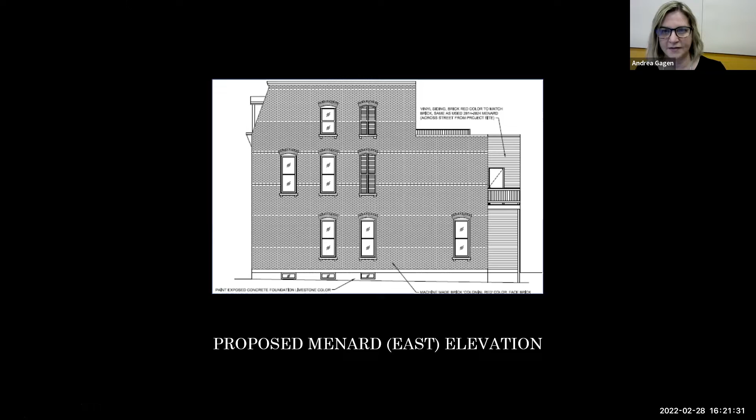I'll talk about this side first. We'd also ask that the brick on this side extend past the window, as the distance between that building and the adjacent building has increased due to the parking pad. The owner stated that he would do that, but we haven't received the drawings for that. Next.

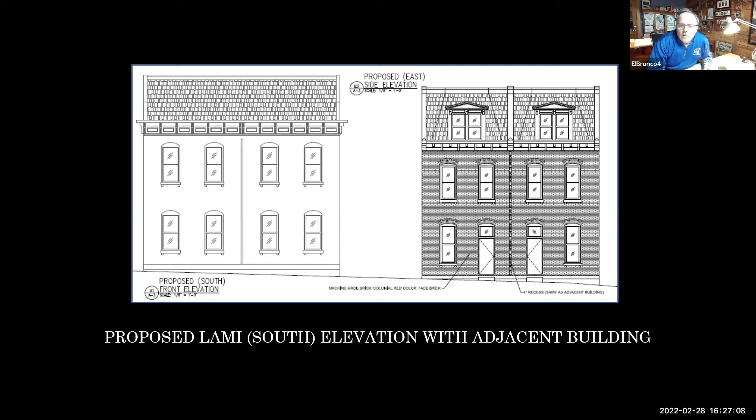Yeah, Andy, I've got a question. So this issue that they had with the curb cut, or the curb cuts, and then the detailing of the one curb cut, is that something that can be addressed by you guys, or is that not in your purview?

Well, the curb cuts, technically, it's not, and I don't believe that's particularly in the standards, except for the fact that it kind of falls into the slope of the yard.

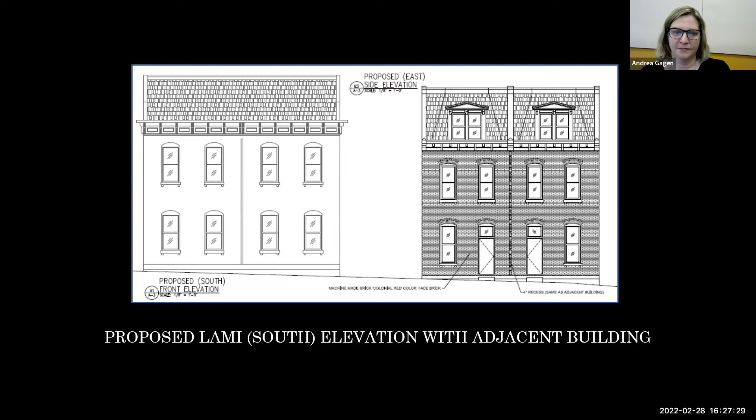Now, on the Lami side, I don't think that's so much of an issue because there's not a huge grade change there at that point.

The one at the back, I would say that falls more within our purview, not so much the curb cut, but the parking pad, because it's kind of all tied together, but because there is a change of the grade there, because the back of that yard kind of slopes up towards the existing building behind on Menard. So it would be helpful to have a little bit more detail on how that was being handled.

Okay. And do you feel you got the usual community consultation that you would get from Soulard on this? No, I think they didn't receive the revised plans until the preliminary agenda came out because the applicant hadn't gone to them previously. So they have had, I guess, since the 18th, it was the first time they saw them.

Okay, and that answer would be the same with the alderman? He saw it at that time too. Yes. Okay, thank you. May I interject, or should I wait till all parties are completed there? I'm finished. Thank you. Okay.

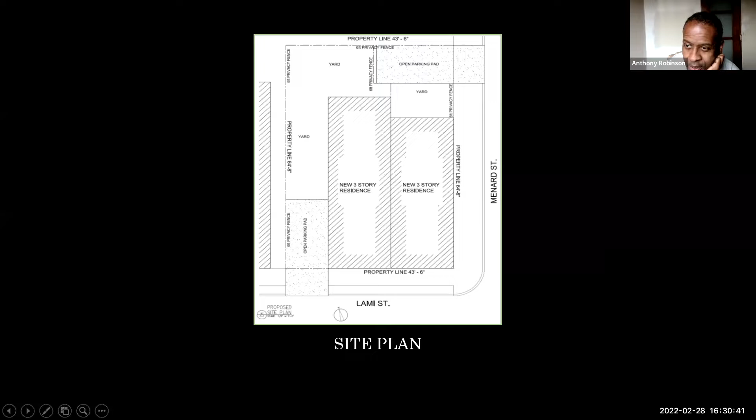Further question, go ahead. Thank you. Andrea, do we do anything about trees? I noticed in some of the pictures there's lots of large trees. Do you know if they plan on just bulldozing all that, or can they save any of them?

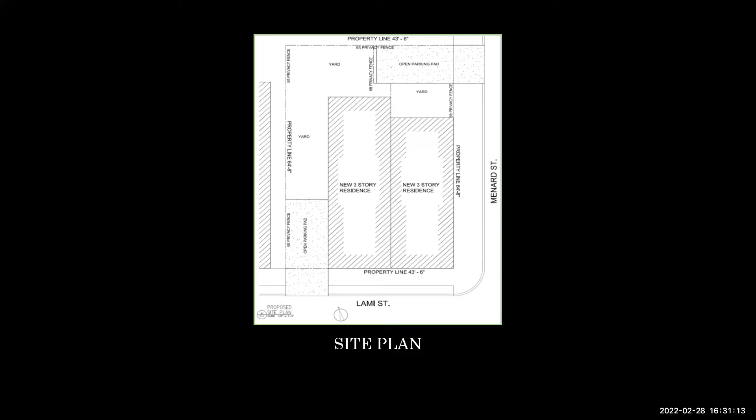That you'd have to ask the applicant. Okay, I'm not aware. Mr. Chairman, can I ask him? No. Okay, as soon as he makes his presentation, we'll direct questions from commissioners to the applicant. Got it. Otherwise it will be as chaotic as Mardi Gras has been in Soulard, and probably just as distracting to members of the restoration group.

So I have one more question. In your write-up it said it looked like there was partial compliance with a bunch of items, so I'm not fully certain of it. You said mass scale, garage placement, ratio of solid to void. That actually, I think, was a leftover from the previous one. It substantially complies. The only thing that only partially complies is the setback and the siding.

Okay, I guess because you didn't have time to update the staff report when he turned in the new drawings on the 18th. Yeah, we hadn't gotten all the details at that point. Okay, thank you. Further questions from commissioners?

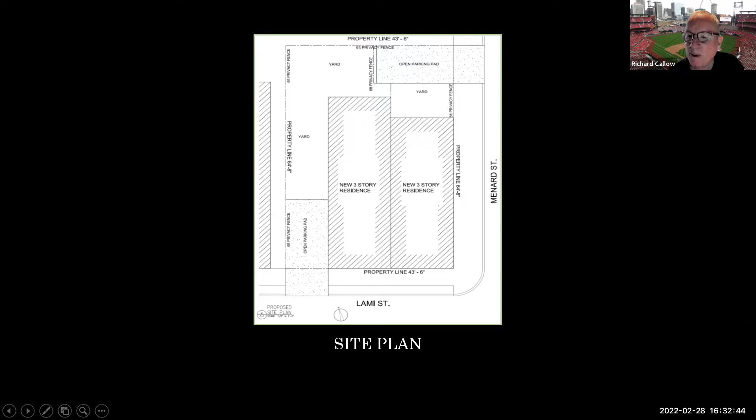Okay, Mr. Askins, let's hear from you. I'm going to speak briefly, and I think you can also direct questions to Jason, he's the architect, he's in the meeting as well. But I just wanted to address, I guess Mr. Callow had questioned regarding how, and I think Commissioner Robinson as well, we made every effort to try and get

Soulard involved after we were declined back in June. I spoke directly with Alderman Jack, and I have many correspondence with him requesting if he wants me to meet with anyone or sit with anyone, to let me know, and or if he could put me in touch with those parties. That never occurred. What eventually occurred was he recommended I speak directly with Meg and Andrea, and that's what we had been doing for the past 4 months or so, back and forth to get closer.

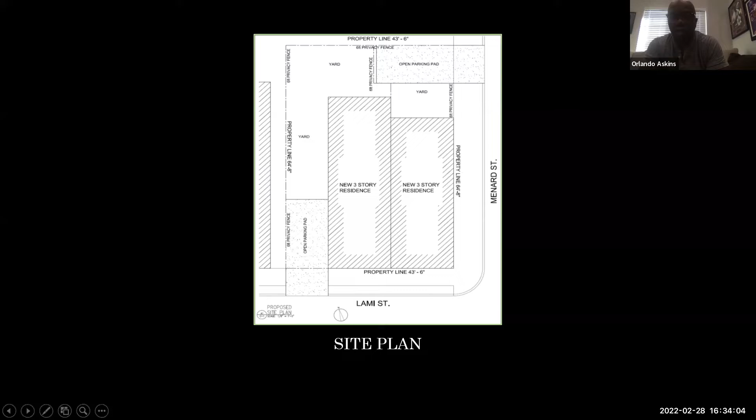And I think we all agree we've gotten closer. We've made substantial compromises and corrections to the drawings from, if any of you recall what we had back in June, in order to try and satisfy the board. We've eliminated, we had examples of garage doors street facing, though some of them were 2-story units as opposed to 2.5-story. There was quite a bit of garage facing doors in there, and we removed that off these drawings just to hopefully satisfy the board, and hope you guys will be pleased with that.

So we've done that. As far as curb cuts concerns, we're going to have off-street parking on this property. It's in the zoning, and it's certainly going to help us when it comes to selling these properties, having some form of off-street parking. So we're only making curb cuts for 2 cars, which would, if they weren't there, the buyers or people who occupy this place would take up at least that many. I think our parking pad would accommodate possibly 2 cars, so that's 4 cars that would be off the street by eliminating 2 curb cuts. So we think that's a plus as well, and it's needed.

I think that's it for me. Other than that, it seems like we had gotten to the point where we complied with every single thing on here that is asked of Soulard's guidelines. The only thing we didn't, I think it was partially, and some of that had to do with material. We're open to working with the board if we have to go with a certain material, fiber cement, as opposed to vinyl. We prefer the vinyl, obviously for cost reasons at this point.

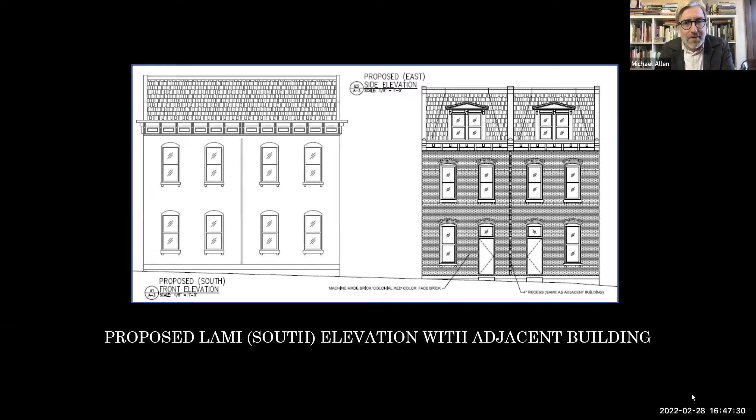This is Commissioner Allen. I joined Commissioner Richardson in trying to take this off the agenda, but since that vote failed, I think we should vote today. We voted to hear this. I don't think deferral makes any sense at this point, and there aren't many complicated issues from the staff perspective. I agree, and we can't set a precedent to take things off the agenda because we know people are against it. To me, that's not right.

Orlando gave his presentation, and Andrea or whoever reviewed it gave their opinion. So I don't see where the complication is. I say we move forward with the vote.

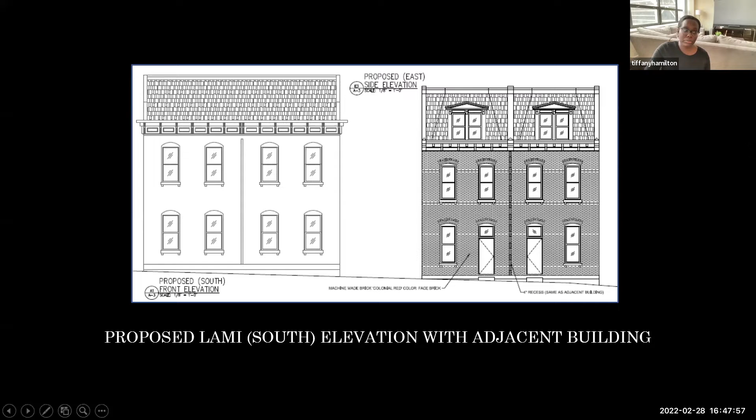I'll add to that. It would be different if people were against it, but that's not what we're dealing with now. We're dealing with a deferral, not people saying this is not right, this is completely wrong. We're dealing with a deferral, which is different than this doesn't work, this doesn't fit.

And obviously Cultural Resources has said they are in support of preliminary approval. So why are we deferring this?

I would only note that staff has said they in fact talked to the applicant last week, and that they had a request from the neighborhood association and alderman to defer consideration until next month. I am understanding of the deferral. This wasn't a surprise today. This is something that's been discussed for the last week because of the intervention of holidays and Mardi Gras.

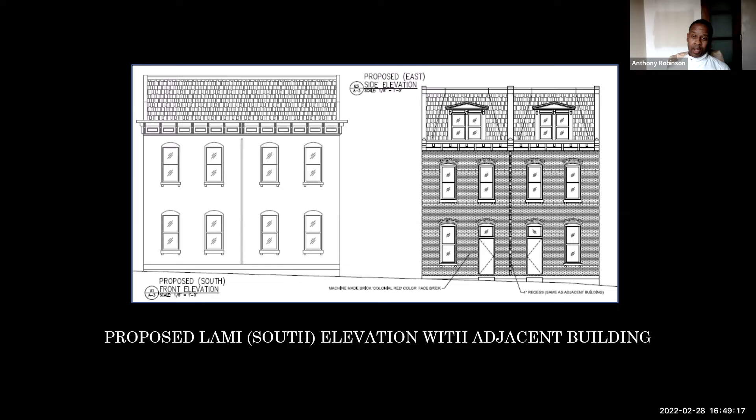Commissioner, if I may interject, this was actually brought to my attention that they wanted to defer, not for the past week, but on Friday. Mr. Askins, yes sir, we are talking to you right now. Okay, I didn't know that. My apologies.

I guess my concern is, we've had other people in front of us who weren't able to make it, and we said, well, let's make a decision based on where we are. So I'm confused as to why there's so much discussion on this when all the timelines were met.

Sorry, that's my laundry going off.

I would add, it is a preliminary review, this is not an appeal. I really don't think it's a major item to vote now. There still has to be a permit, there still has to be further review. We've spent so much time talking about this, I don't know why we can't proceed.

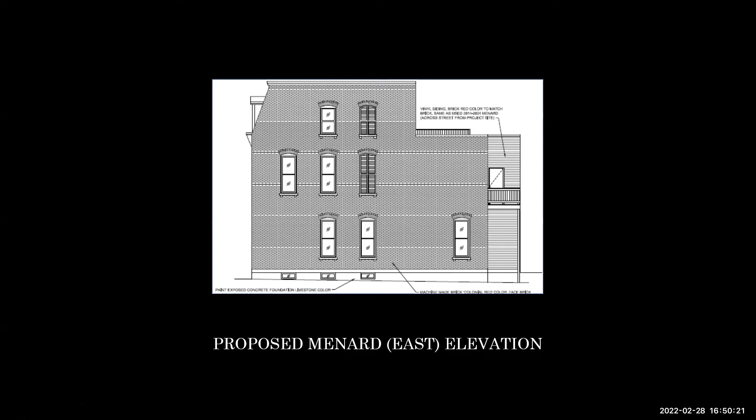I would like to call the question, Mr. Chairman, is that how we get a vote going? I can't even tell who's speaking. Commissioner Weber. It's Commissioner Weber, I have no way of knowing that. Where's your camera, Commissioner Weber? There you go, all right. At least he's not in his car. Okay, some of us work.

Is there any further discussion? Okay, Commissioner, there's a motion on the floor that's been made and seconded. I will call a roll.

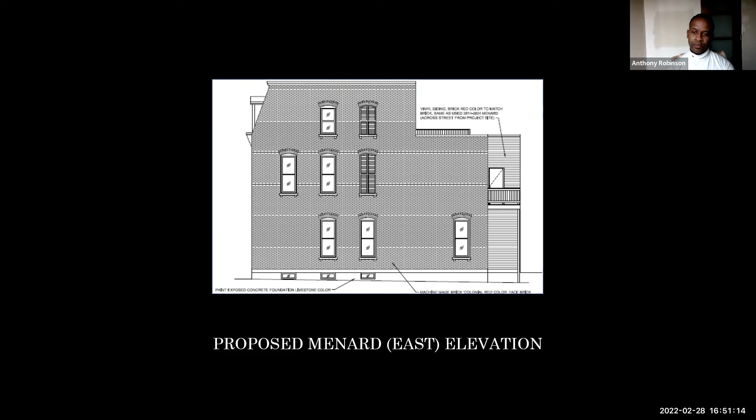Commissioner Allen, do you vote yes or no? Wait, could you restate the motion, Mr. Chairman? Motion is to defer consideration. No. Commissioner Robinson, do you vote yes or no? No. Commissioner Hamilton, do you vote yes or no? No. Commissioner Killeen, do you vote yes or no? Yes. Commissioner Richardson, do you vote yes or no? Yes. Commissioner Weber, do you vote yes or no? No. That is 4 no's, 2 yeses, and the motion fails.

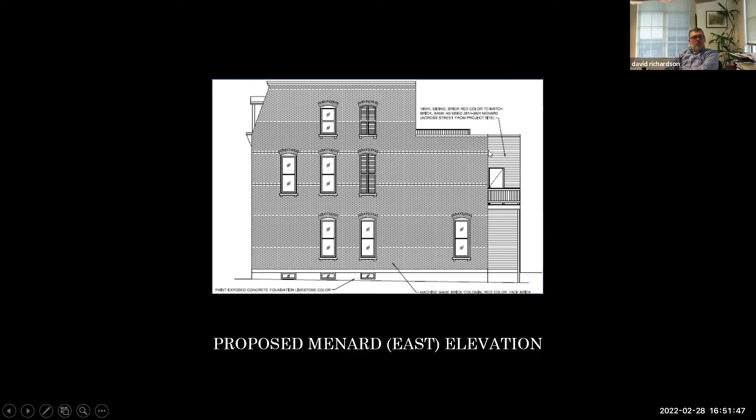Do I hear a second motion? I have a motion. I move that we grant preliminary approval with the conditions that the siding on the east elevation and rear of the building be 4-inch cementitious lap siding, and that the Cultural Resources Office review and approve final design details and exterior materials and colors, and that the applicant meet with the SRG one time. Is there a second? Second.

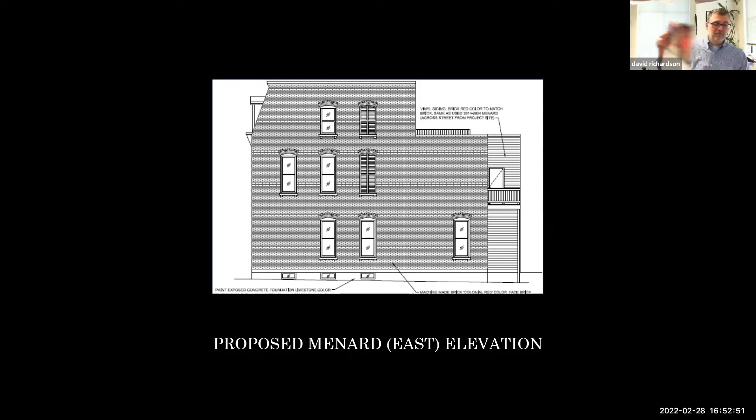Any discussion? Hearing none, I'll call the roll again, unless somebody moves the previous roll. Any objection? I'd like to change my vote on the previous roll, though. Okay, I'll call the roll. Commissioner Allen, do you vote yes or no? Yes. Commissioner Robinson, do you vote yes or no? Yes. Commissioner Hamilton, do you vote yes or no? Yes. Commissioner Killeen, do you vote yes or no? Abstain. Commissioner Richardson, do you vote yes or no? Yes. Commissioner Weber, do you vote yes or no? Yes. Chair abstains. That is 5 yeses, 2 abstentions.

The motion carries. Thank you, commissioners. Do we have our special agenda item yet? We do, I believe Jason Whiteley is in the room, and I'm going to attempt to let him share his screen. Give me just one moment.

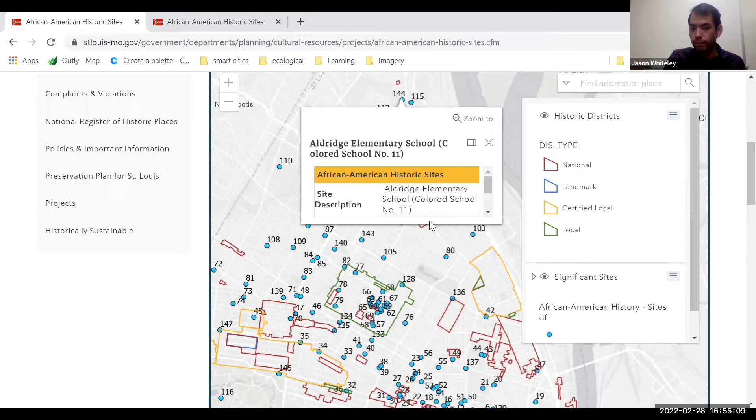Over the last few weeks, CRO and PDA have been working to identify and map sites of cultural and historic significance to the African American community in St. Louis. We've been able to publish that work on an interactive web map, which we've made available to the public through CRO's homepage. From the CRO homepage under the project section, we've added this map of African American historic sites. As you can see here, we've identified, I believe, about 150 sites of significance so far. We've made this resource public so people can see where these sites are in the city and also learn a little bit more about them.

I'd like to emphasize that this web layer is still preliminary, and we're hoping to continue to add new sites and also add some additional information on the sites we've identified thus far. All of the little blue dots are sites, and you can click on them to see the site description, its address, its neighborhood, and then we've also provided a layer with historic districts for additional context.

I think that was all I had to share. Are there any questions? That is pretty awesome. I think it's really great that we've been able to allocate some time to this work, and I hope that we can continue to develop it and put it to some good use.

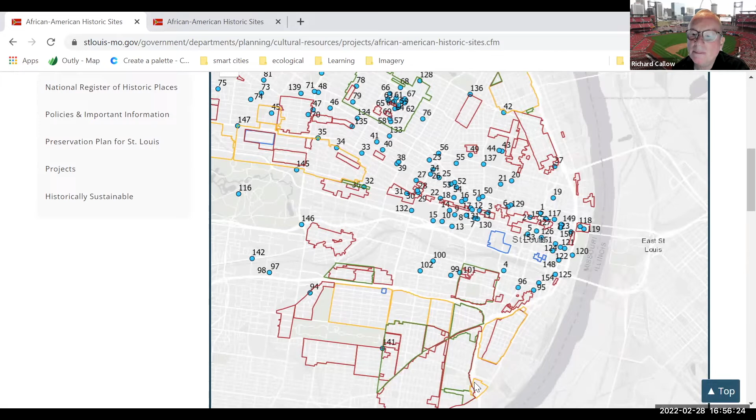Commissioners, any comments? I think it's cool. I love it.

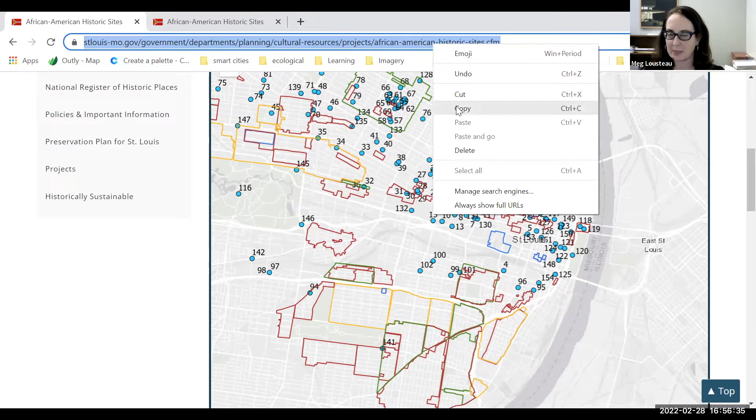Mr. Chair, if I may add, we realize that this map is not comprehensive. It doesn't include everything. There's so much research to do. During the last board meeting, I mentioned that we would like to go after some historic preservation fund grants. This seems like an ideal project for us to try and get a grant to study, to do an inventory, much like we did of flounder houses and mid-century modern properties, to do a more comprehensive inventory of sites important to the African-American history of St. Louis. I look forward to expanding on this great groundwork that we've already laid with Jason's help.

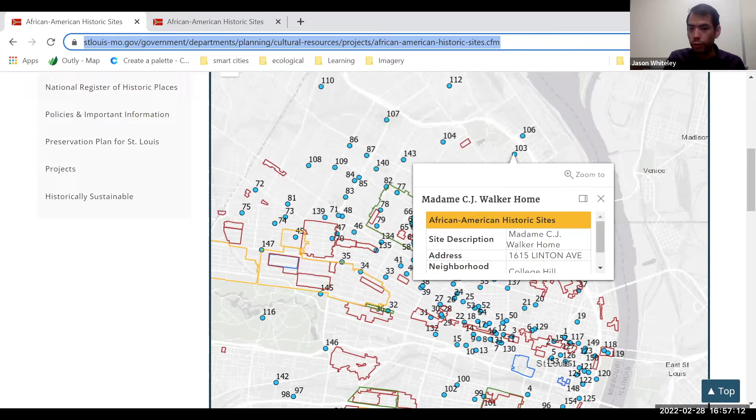I love this. Meg, would you be sure that the clerk of the Board of Aldermen, former Alderman Terry Kennedy, former Preservation Board member Terry Kennedy, gets to see this? I will absolutely do that. It is a project that I believe he would strongly appreciate.

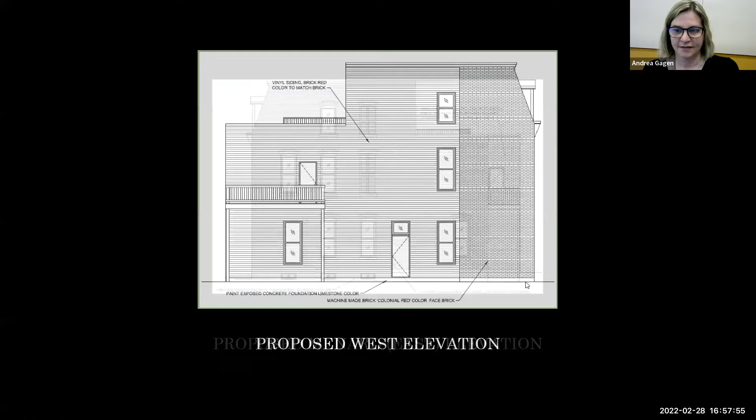Thank you very much. Calling agenda item B 3234. Can we get the PowerPoint back? Okay. All right, my plan is to call these things randomly so that the PowerPoint is never correctly lined up. Bob, aren't you glad you're back? Sorry, I was on mute. He's thrilled, it's wonderful to be back. It's great, we're thrilled to have him, believe me.

All right, this is 3234 Hawthorne Boulevard, Compton Hill Historic District. You might remember this from a few months ago. They had come in to get approval for a porte cochere, which was not approved. And they've changed their plans at this point.

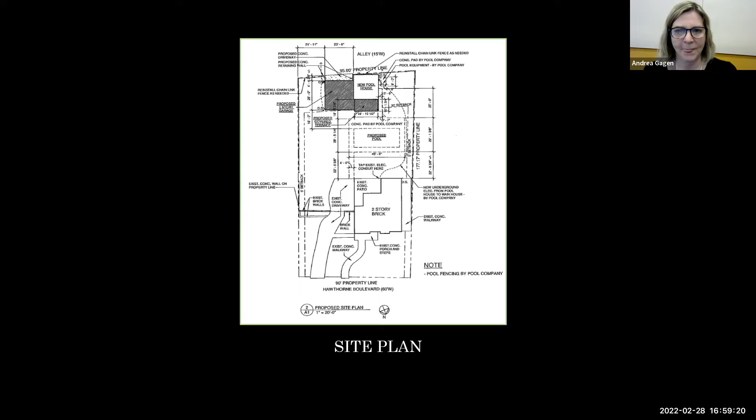Our issue is that while the existing garage is stucco, only an extremely small amount of that will actually be visible from the street once the new gabled cover and the addition are added to it. We recommended that they use brick on the addition instead of stucco, because it does not conform in style or design to the architectural style of the period in which the principal structure was built. There is no stucco on the main structure.

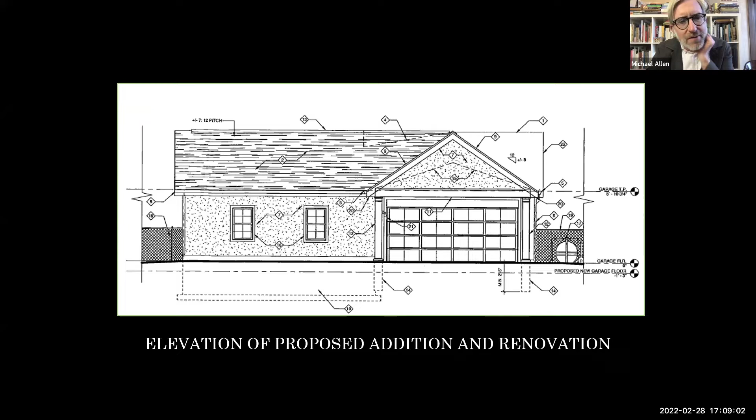Commissioner Allen, that would be my understanding as well. If staff differs, jump in, but I definitely think we're just talking about this wall elevation to the left of the garage opening. I had understood the motion to refer to the wall. Okay, I understood it as for any front-facing materials.

And likewise, I understand that the side elevation, not ceiling, we can maintain as stucco or siding. Do I understand that correctly? So we could choose to use stucco or siding for the side elevation. Now, does that suggest we could also use stucco or siding for the gable? That's something we can discuss.

It sounds like you have a supportive neighborhood group and a supportive preservation board and a willing staff. And I suspect this project is going to be a very good one. I think so. Okay, thank you very much, commissioners.

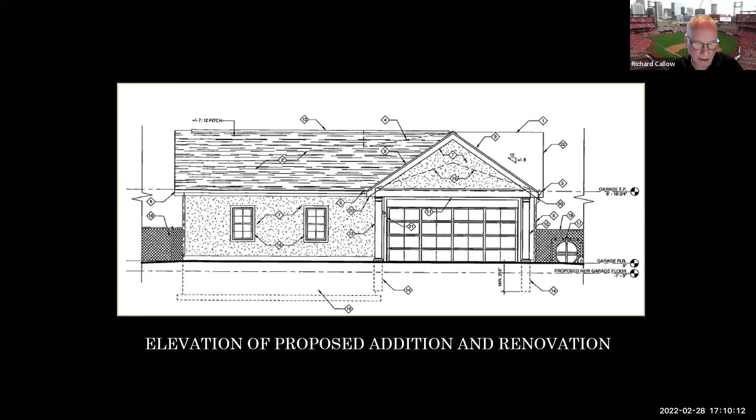Let's do agenda item C, beginning with 33. Okay, this is 33 Westmoreland Place in the Central West End Historic District.

This is an application for the extension of the side elevation. Next.

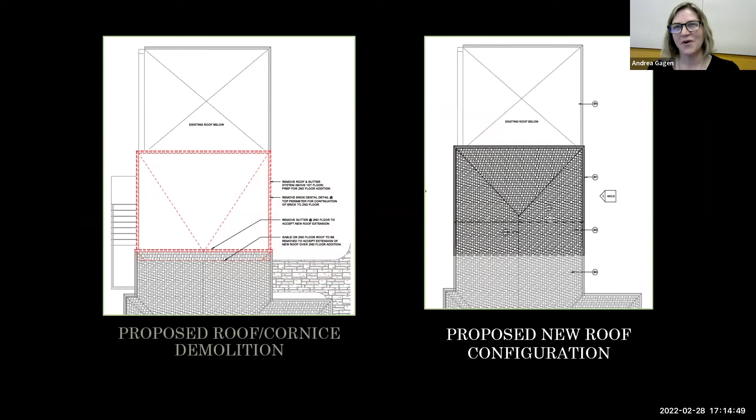Gagen, this is a trick question. Did you consult with the 28th Ward Alderwoman? Well, that would have been a little tough, as there is no 28th Ward Alderman at the time. Okay, you passed the trick question.

Commissioners, questions for Ms. Gagen? Okay, let's hear from the applicant.

Hi, I'm Rachael Dolan with Mitchell Wall Architecture and Design. For this home, it is highly visible on Lake Avenue and Westmoreland Place.

So far from this design, we have gotten very strong support from the trustees and neighbors, especially the one across the street at number 35, Rick Zimmerman. He's done quite a bit of historical renovation throughout St. Louis, and he was very thrilled with this proposal. So it has been well received in the neighborhood. I know they gave a glowing recommendation for it via letter.

There has been a lot of discussion with the Central West End Association. The first discussion was coming back with an alternate roof and different material, but we found that the alternate material was not present in the rest of the house. So we were a little concerned about the visual character, especially with a house of this nature. Following up that conversation, there was openness to having it blend a little bit more with the home.

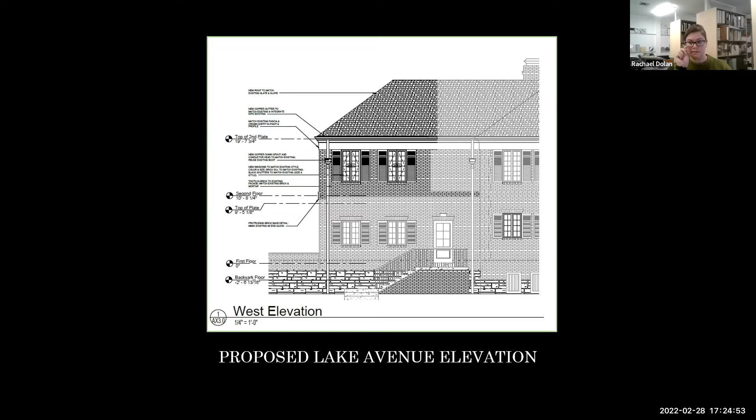Ms. Gagen, your response? Well, I think the band that they have now is the same as what's on the building, so I'm not sure that really distinguishes it from the original. I think they were proposing it to be more like a soldier course, or something slightly different than what was on the front portion of the building, so that it would distinguish it from what was already there. The trustees don't necessarily look at the historic district standards when making their decisions. What we have to go by, and what the neighborhood looks at, is the historic district standards, which I don't think this complies with at this point.

Okay, thank you very much. Commissioner Allen, another motion from you? Oh, thank you. I move that the Preservation Board withhold preliminary approval of the proposed addition, as it does not meet the Central West End Historic District standards. Is there a second, commissioners?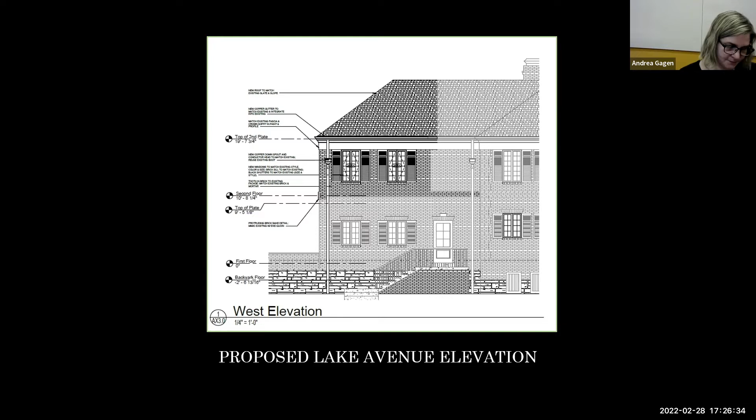Discussion? Commissioner Robinson? Yeah, so I think the applicant is probably in a really tough position here with this design. I've looked at it, reviewed it. I question whether they can create a nice design here, given what they have to work with, while meeting the requirements. I do understand the delineation between old and new, but honestly, short of changing brick patterns, things like that, to delineate old from new, I think anything else comes across as a not well thought out add-on.

Even if you've given some thought to it, it comes across in the final product as a not well thought out add-on. Because of that, I think we put the applicant in a really tough position with this design. Honestly, I think the only decent design here is essentially what's sort of there going on top of what's existing. But I think the delineation needs to happen in the materials that already exist, more so than trying to bump out and make changes like that, because I just don't think that comes across as a well thought out design. That's the issue here. I think you could do that, but you're just not going to have a good design. So now the question becomes: what's the lesser of the two evils? A design that complies but doesn't look very good, or a design that doesn't quite comply but works?

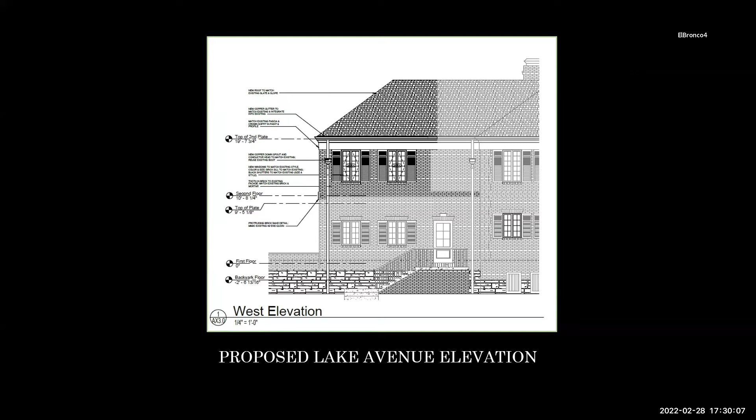Commissioner Kalina, are you still on? Still here, yes, sir. Observation, you've done this. I would defer to Mr. Dwyer, that's his part of town, and I think he made a great argument.

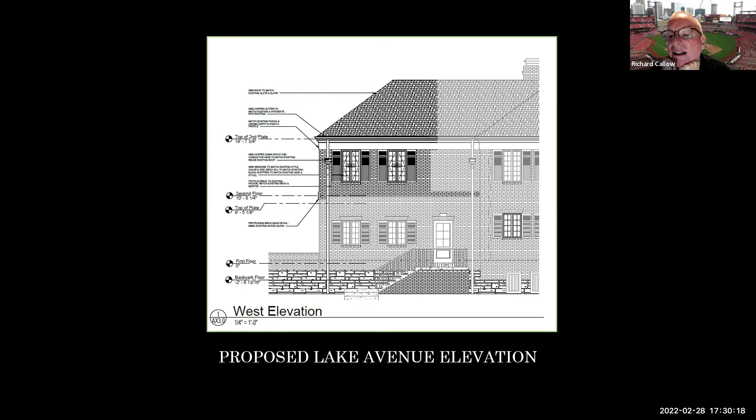Commissioner Allen, your motion? Yes, I disagree somewhat with Commissioner Robinson. I think the standards offer a very clear path here, but it sounds like from hearing the applicant's architect and Mr. Dwyer that the gap between these perspectives isn't quite that wide. What I see here is that the Cultural Resources Office is actually allowing a lot of continuity with fenestration and form. And I see the slate roof and the brick, and I keep thinking slight differentiation in color could resolve some of this issue, something that clearly is not original but not widely different, and doesn't require a change in material. I would be comfortable with that as a member of this board, but I don't see that here. Thankfully, we're on preliminary review. I do think for the applicant this is a good use of preliminary review, so I'm glad we're looking at it early.

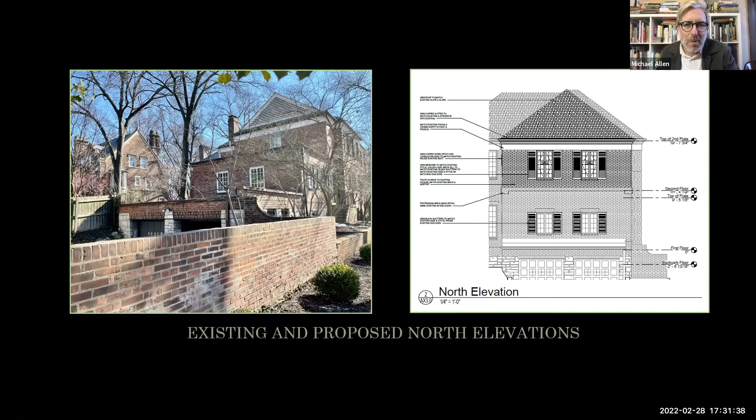But I don't see this as so irreconcilable. I think it sounds like, given all the inputs, maybe a strong input from this board could help resolve what seems like intractable tension.

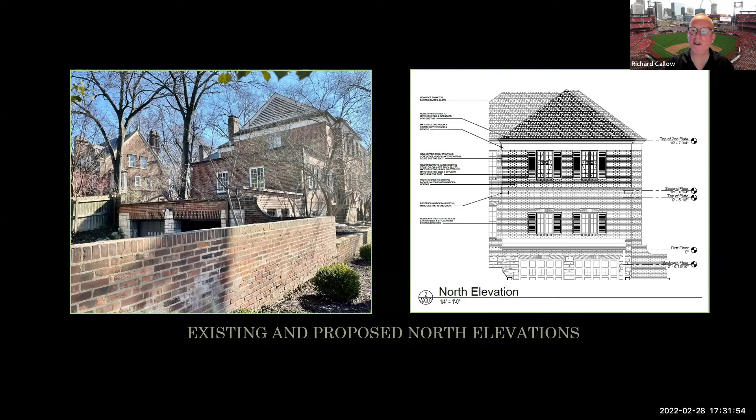Any other commissioners with comments? Okay, hearing none. Commissioners, there's a motion on the floor that has been made and seconded. I'm going to call a roll.

Commissioner Allen, do you vote yes or no? Yes. Commissioner Robinson, do you vote yes or no? Abstain. Commissioner Hamilton, do you vote yes or no? Yes. Commissioner Killeen, do you vote yes or no? Yes. Commissioner Richardson, do you vote yes or no? Yes. Commissioner Weber, do you vote yes or no? Yes.

The chair abstains. That is 1, 2, 3, 4, 5 yeses, 2 abstentions. The motion carries. Thank you very much.

Commissioners, moving through our agenda, I call agenda item D, 2018-2020.

Am I unmuted, I hope? I'm Jan Cameron with the Cultural Resources Office, and this is a preliminary review application to construct 2. Jan, are you speaking? Oh, I'm not unmuted. Oh, that was pretty good, wasn't it, guys? Oh, you're so.

This is a preliminary review application to construct 2 detached, 2-story single families on this vacant piece of ground in the McKinley Heights Local Historic District. Next, please.

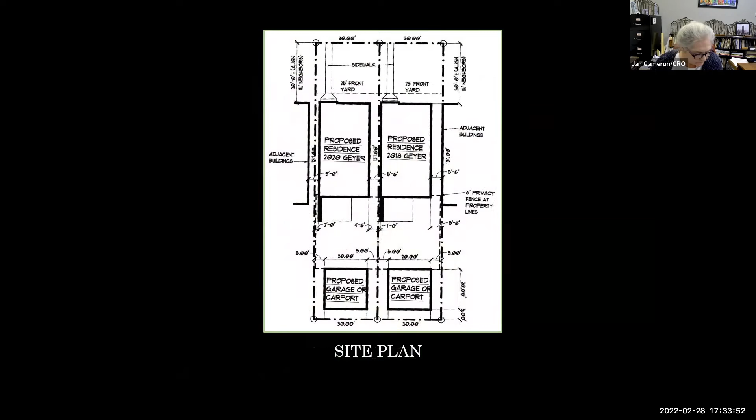And the site plan includes 2 garages located directly behind each house. Next.

And this is the front elevation. It will be the same for both. What you can see from the notes, but not so much from the rendering, is that the right section of the house will be a different color brick than the other, but they'll both be brick that's appropriate for the neighborhood. Next.

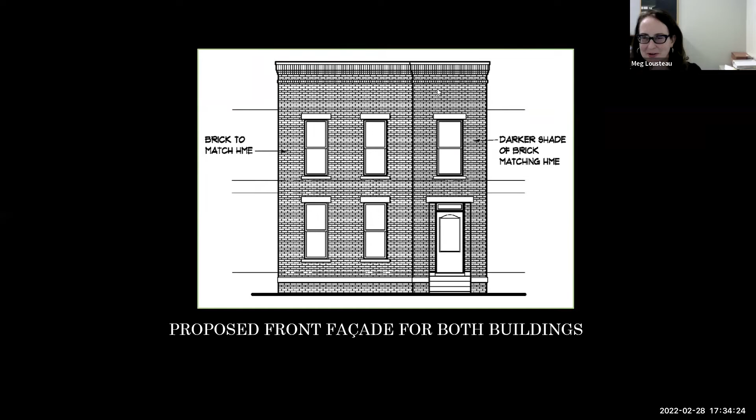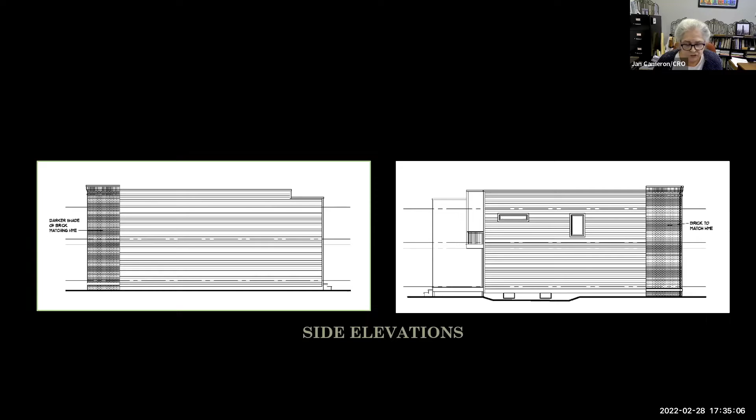These are the side elevations, and they return, as we usually require for new construction. The brick returns the same distance as the distance between the buildings. That's what's shown here. Next, and they will be very close to the adjacent buildings.

Okay, so the context is very good. Now, we had initially seen a very contemporary design for this site, and in fact, the applicants were going to pursue the compatible new construction policy. But in the revisions after meeting with us and with the neighborhood group, the revisions really made that unnecessary, that they're actually following the standards in almost every point, with the exception of the brick foundation color, or the brick foundation and the color of the brick on the facades, the two different colors. Those we think are very modest changes and do not detract from the compatibility of the buildings.

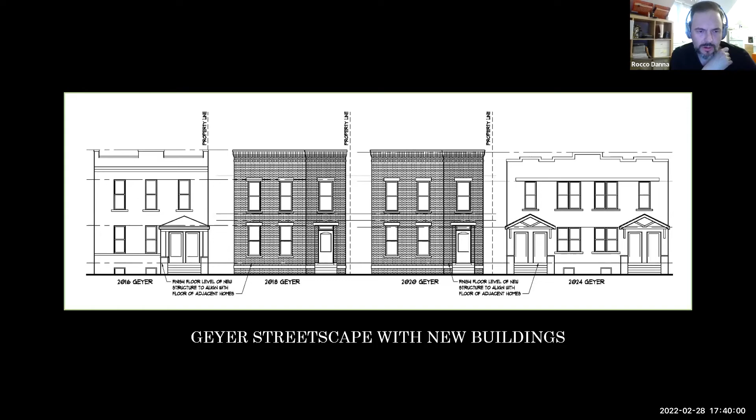The other observation I have is that the streetscape, thank you, makes it appear—I understand these are done very quickly—that the windows are really in rhythm and proportionally in size with the neighboring buildings. However, if you look at the neighboring buildings of 2016 and 2024, you'd find that they're a little bit squattier, and in 2024 they're again a little bit squattier. They're not as lean as shown in the elevation.

Also, we would like to see fiber cement siding used in lieu of vinyl. This is something we've always been pushing for to have changed in our historic code, fiber siding with a 4-inch exposure. So other than that, I don't think I have anything else to comment on at this time.

Great, thank you very much. Meg, anybody else to speak? There's no one else.

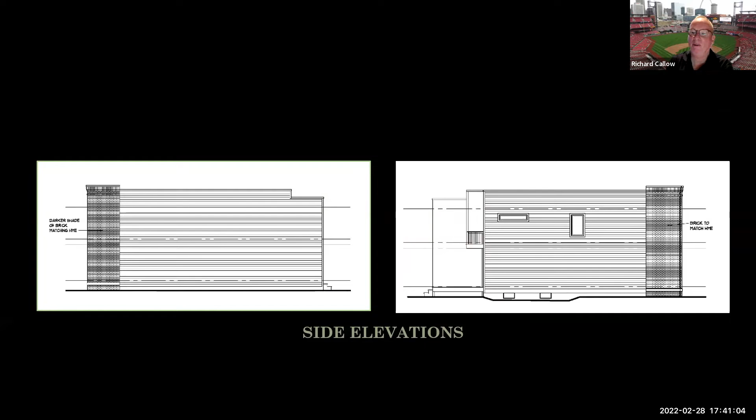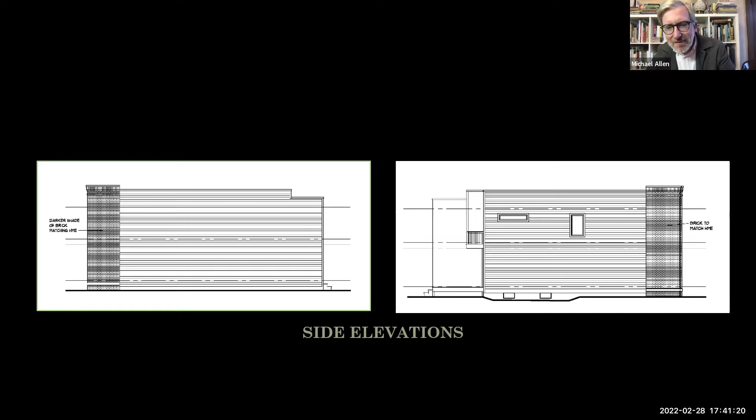Okay, Commissioner Allen, ready for another one of your learned motions? Me again, Mr. Chairman. I move that the Preservation Board grant preliminary approval of the project, subject to review of final drawings and exterior materials by the staff. Second. Okay, any discussion?

Okay, then I'm going to call a roll. Commissioner Allen, do you vote yes or no? Yes. And Commissioner Allen, that will be the last motion I ask you to make tonight. Thank you, I'll keep my video on anyway.

Commissioner Robinson, do you vote yes or no? Yes. Commissioner Hamilton? Yes. Commissioner Killeen? Yes. Commissioner Richardson? Yes. Commissioner Weber? Yes. The chair abstains on this vote. I count 6 yeses and the motion carries. Thank you very much, commissioners.

We're going to take a 2-minute break, and then we're going to come back and hear an unusual appeal.

I was so excited to see that yellow house in the presentation. I sold that a few years ago, that was a good looking house, a great house. Did you get a good one? The judge's house, yeah, it was the judge's house. I hope—it sold before it hit market. I sold it to a buyer before it hit market. Gorgeous house. It was. There it is. Yeah.

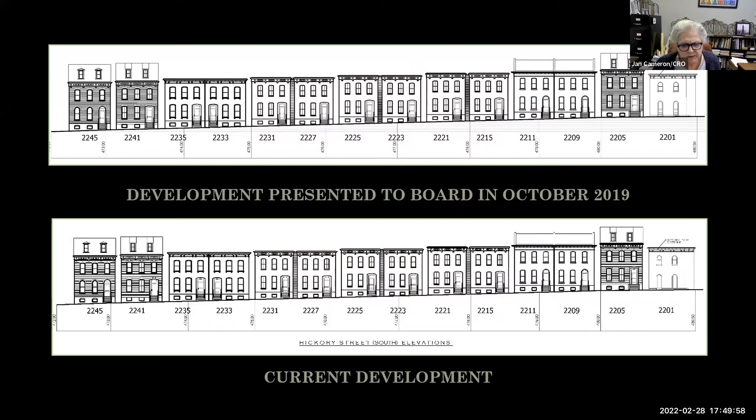What you see at the top was what was presented and approved by the Preservation Board in October of 2019, showing some detached townhouses and some with side gable roofs. Below that is the currently proposed design, which is a little bit different, though it looks like it's just about the same, doesn't it? Next, please.

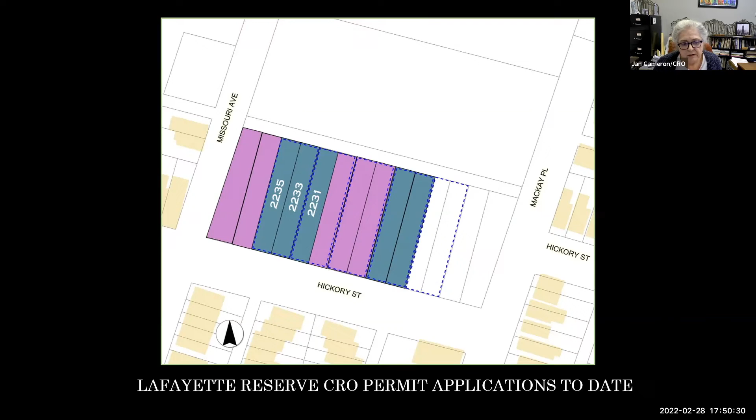This is a little chart I put together regarding the status of permits that the Cultural Resources Office has seen and approved. The violet color indicates full building permits for full buildings, and the gray color is for foundation-only permits. Those that are numbered are the three properties being appealed at this meeting.

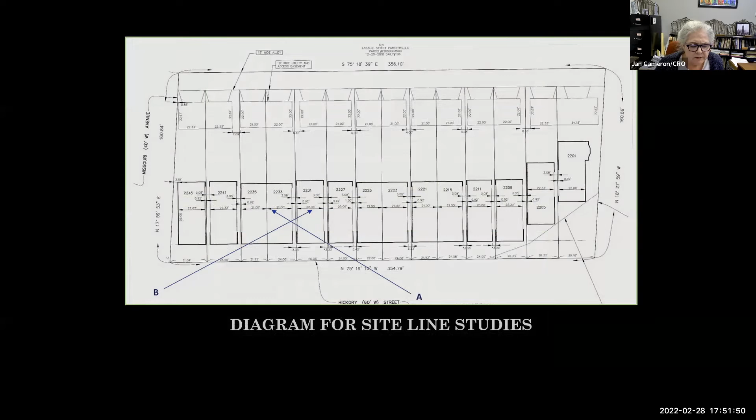These are some sightline studies that were submitted to us by the applicant, but he is going to present them in more detail, so we'll skip over these for now. The contention is that these protrusions, as illustrated in this elevation, will not be visible from the street.

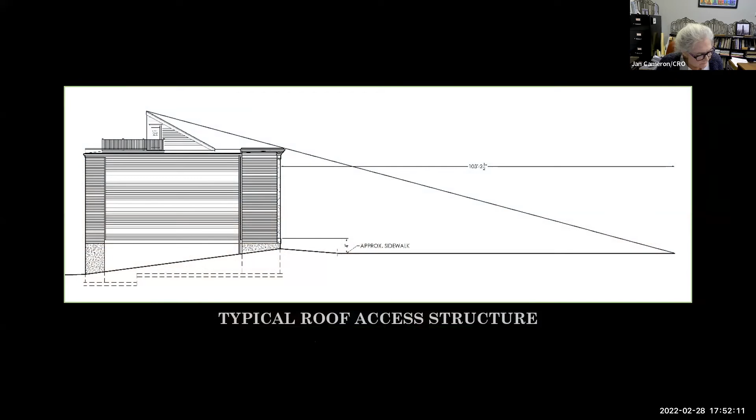This is the corner property. We are on the western end of the site, and the 14 townhouses will fill this entire side of the 2200 block of Hickory. This property will be visible both from Hickory and from Missouri, the street on the left. Currently you can see some foundations have already been constructed from previously approved applications.

And we're proceeding eastward along Hickory. Next.

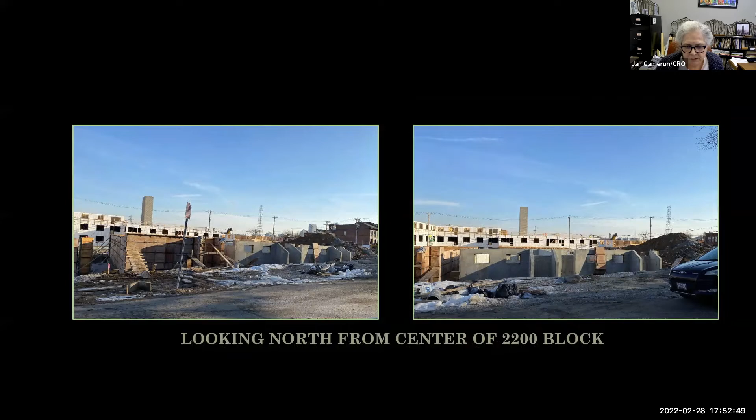And now we're looking back. This is again the site, but what we're looking at is a partially completed apartment building, also approved by the board, which still needs a couple more stories constructed and will border these properties on the north. The slide on the right begins to show you MacKay Place, and the visibility of this property from MacKay and from Hickory.

Again, this is MacKay, and we're looking towards what's known as the ellipse, which was constructed maybe 30 years ago, longer than I've been here. You can see that it's almost impossible, I feel, that these roof additions will not be visible from the street. The right slide is the alley that will divide the commercial, the apartment building from these townhouses.

Now we're proceeding from north to south on Missouri, past the apartment building. This is the corner of Missouri and MacKay. And again, particularly the slide you see on the right is going to be... I don't know how this possibly can be hidden.

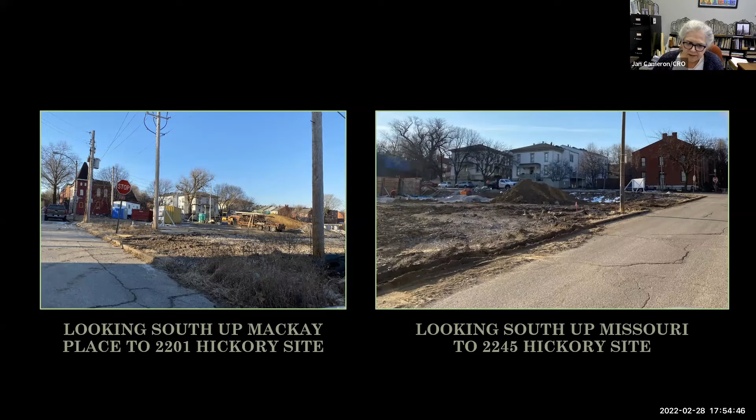But I'm going to let the developer make his case. One of the alternatives that we thought about doing was to change the shape of these very unusual forms into something that's more like a monitor or a flat roofed addition that you sometimes see. You don't normally see those on residential properties, but in order to give the developer every opportunity to make his case, that is something that the board may consider.

And that's it. So the staff is recommending again that any approval of these additions not be upheld until and unless we can all be convinced that we can't see them.

So, any questions? Is it good enough that we're convinced, or do you have to be convinced also? Well, we're all going to be convinced. Any questions, commissioners?

Okay, Jeff. This is an appeal of a denial, so I'll need your name and your affirmation that you're going to tell the truth, and I'll need you to introduce any documents or other materials that you want in the permanent record.

All right, my name is Jeff Winzerling. I promise to tell the truth. My address is 4229 Maryland Avenue, St. Louis, Missouri. Now, we've actually stopped doxing people. Oh, really?

I'm here on behalf of Lafayette Reserve LLC. I swear to tell the truth. Proceed.

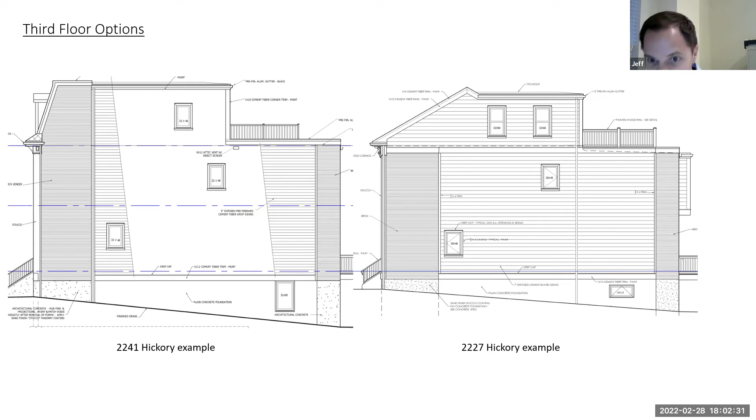And then let's go back 2 slides up. There you go. There's some other stuff going on the roofs here in addition to third floors, and that's what we're really here to talk about. This is 3 slides ahead. There you go. It's - I call it a pop-up. The architect, Barry Nelson, calls it a roof monitor, as you can see down there on his sightline drawing.

But the third floor space is extravagantly expensive. To do a third floor and a roof deck is $151,000 right now - that's the mansard style. The non-mansard style is just a little bit less, remarkably. You don't save that much money once you pay for the staircase and the additional framing and the full bath. So it's a lot of money.

And lots of the buyers wanted to get up and outdoors. That's been a pretty consistent demand. Even one of the houses that doesn't have a roof pop-up, the buyer has put a 2nd floor deck on the back of one of the 2nd floor bedrooms. So getting outside and up in the air has been a real consistent demand from a lot of our buyers.

And so we came up with this solution of the pop-up, which is designed to be inexpensive because the 3rd floor is so expensive. It's this triangular shape - essentially an indoor staircase that leads to a door that allows you to go outside on the roof. On a couple of houses, there's like a little coffee bar on the 2nd floor, so that if you're up on your roof deck and you don't have any living space next to it, you can still easily get to a place with a sink and a refrigerator or something like that.

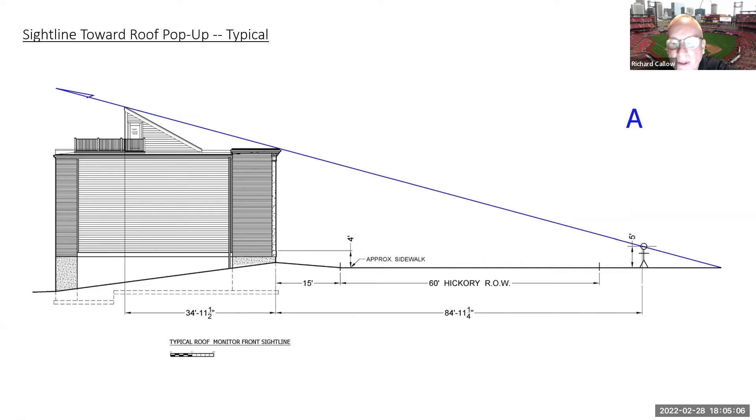Jeff: So I have a question - how tall is that person, and why does it have an arrow in its head? You have to talk to Barry about the arrow, but the person is probably about 5'5", 5'6". If their eyeballs are at 5 feet off the ground, you probably get about 5 or 6 inches of head above your eyes.

That's what we used as the standard height for all of these. The geometry is worth noting though. The right of way of Hickory: sidewalk, tree lawn, street, tree lawn, sidewalk on the other side totals 60 feet. You can see this person is 85 feet away from the building. We're 15 feet back from the property line, so it's a total of 75 feet away from the south edge of the Hickory right-of-way, or the south edge of the Hickory sidewalk. You'd have to be 10 feet beyond that in order to see even an inch of the top of this roof monitor.

There's some more we're going to look at that I created, and I don't have the technical skills or software that Barry does, so they're a little cruder. But our goal is to illustrate what I thought was clear from the beginning, but I'm still trying to persuade you all, is that these will not be visible from the street.

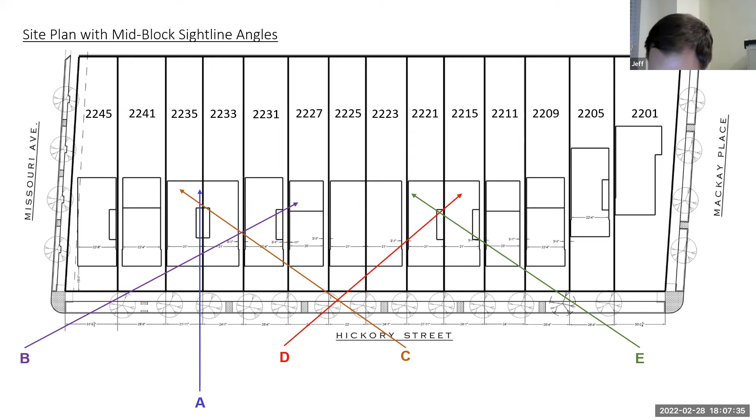Next slide, please. Oh, I guess I should mention these are a little conservative in how I do them, because where Barry was able to actually plot the house in his software and show you the cornice and how far it projects from the building, I'm just using the face of the building as though it were the first line. So it's slightly conservative, but let's look at the next slide.

Oh, hold on a second. Let's go back. This one imagines, once again, a person whose eyeballs are 5 feet off the ground. All of the ones I did are a little different. Barry's was: how far away would you have to be to see just a skosh of the top of the pop-up? With my limited technology, I just said, okay, how about I put a spot 20 feet out into the street and see what we can see from there. So mine are a little bit different.

But this is one of mine. It's a spot 20 feet south of the north curb of Hickory, so it's past the middle. Hickory is 36 feet wide, so 18 would be the dead center of the street. This is a little bit past the center of the street. It looks up toward the roof monitor on 2231, because the ones on 33 and 35 cannot be seen from that point, since the arrow would be cut off by the 3-story building at 2241.

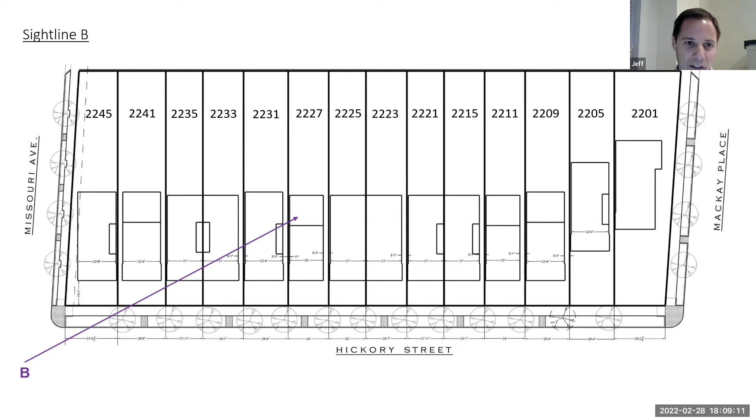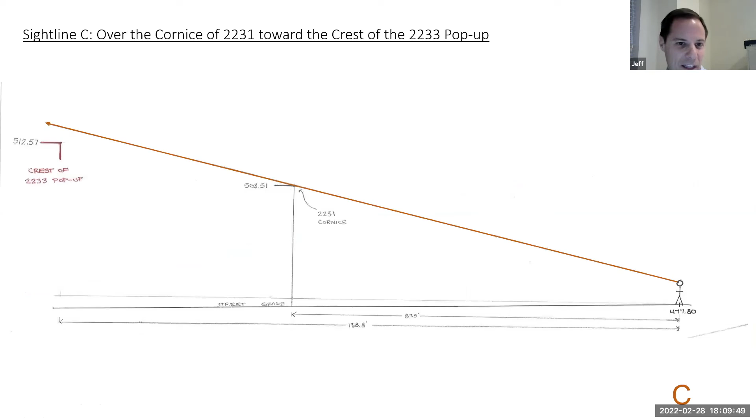Let's move through the next couple — next slide. So here's C. Next slide. The line passes over the top. Next slide.

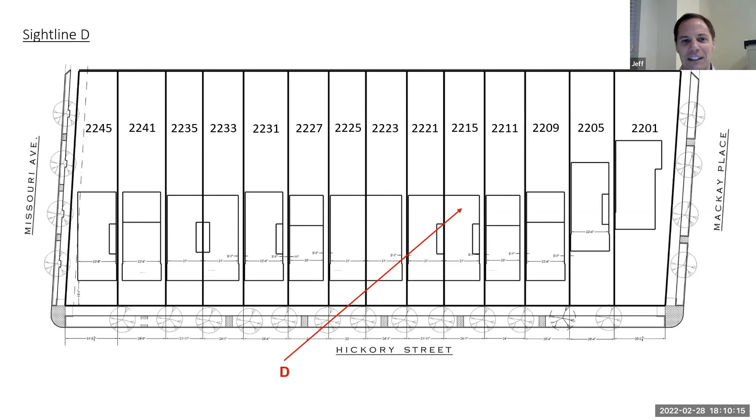So D here, we're looking from another point. I actually did one from even farther west on the street, kind of sneaking in an angle that was just clearing the 2227 three-story building. It also cleared the top of the monitor, but it would have needed a different aspect ratio or a different scale, so it didn't fit — it stretched off the end of the paper.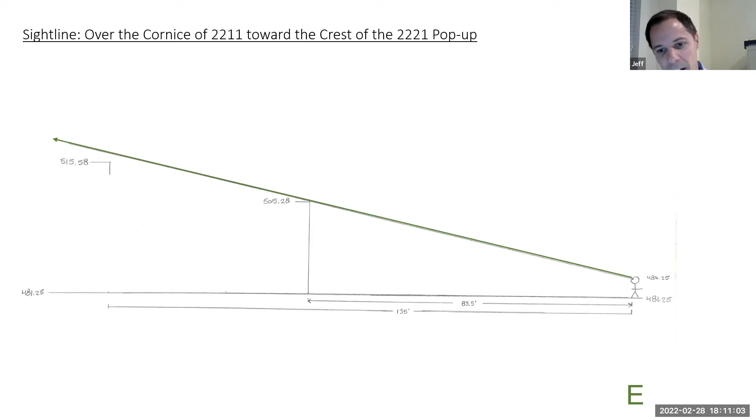Next slide. I feel like this is kind of enough. I've already shown you that you can't see them. I also have dragged 2215 and 2221 into this, even though the subject at hand is supposed to be 2231, 33, and 35. I want you to consider, and if you're able to offer an opinion on 15 and 21 and the visibility of a pop-up on those houses, to do so.

But then I do want to take a few minutes to talk about 2245. That's why it's circled and highlighted in yellow. This is the corner house. It's the only one that's not sold. Next slide.

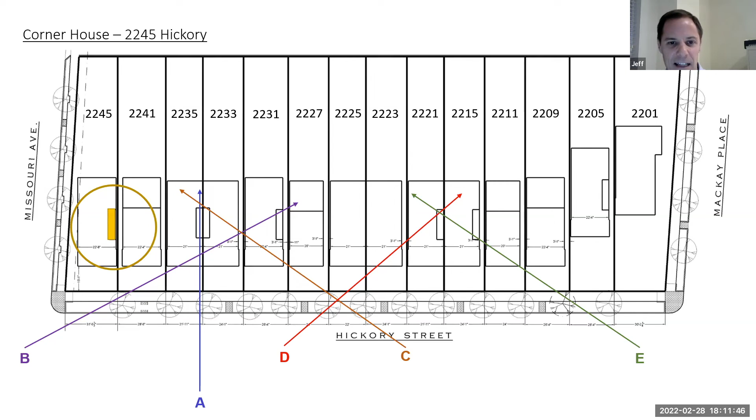We're going to take a look at a few of these sight lines. A, as you'll recognize, is a section through, so it's the exact same drawing, not quite. Next slide.

Looks just like the previous drawing, except I substituted a picture of the 2245 building and its relationship to grade for the one that was in there before. But essentially, it's the same phenomenon. Next slide.

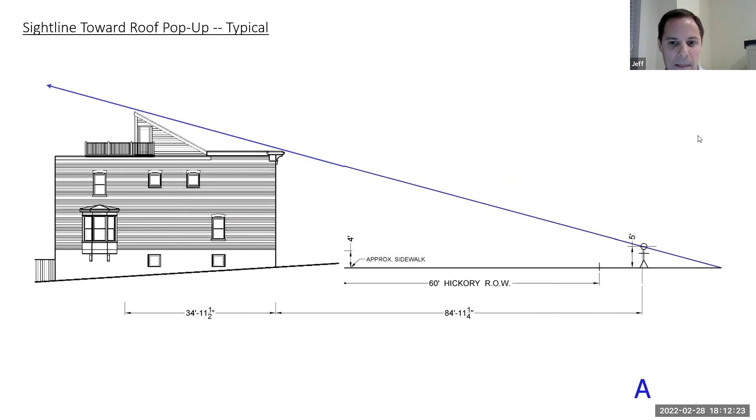The point X here is at a point in the intersection of Hickory and Missouri on the parallel with the south curb of Hickory. And it's about 20 feet out into the street from the east curb of Missouri.

So in this one, you go over slightly over the corner of the cornice of the house, and you're trying to hit, we're always trying to hit the very highest point. If you can't see the highest point, you can't see any of it. Next slide.

You can't see it. It goes right over the top. Next slide. This is point Y.

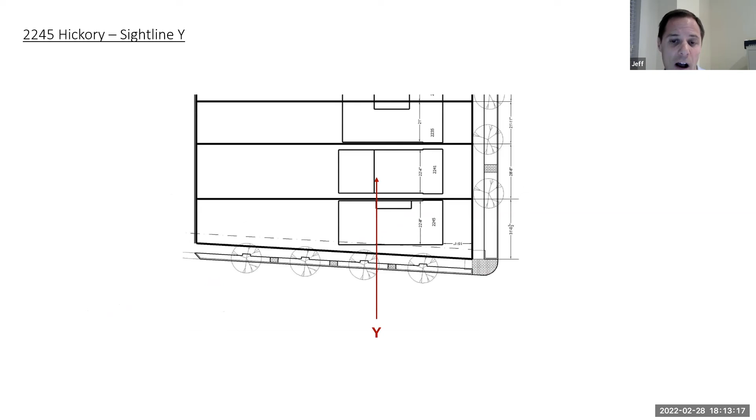This is a perpendicular view from across Missouri. Missouri is only a 40-foot wide right-of-way. So the bottom of the arrow where Y is would actually be someone whose eyeballs are 5 feet off the sidewalk with their back pressed up against the building that is on the other side of the street, because it's at the very edge of the right-of-way.

Next slide. You can see it's very steep when the street's only 24 feet wide. If you can only get this far away, you're only 45 feet away, that a building that tall is going to block anything. Next slide.

So before we look at the last one, I think that in Jan's presentation, she showed you some current shots of the site that show that building going up back there. They give you a pretty good idea of how much that building blocks any view from the north. Here's a view from the side that shows you how tall that building is.

All these folks who are doing roof decks, I tell them right up front that they're not going to have a panoramic view. I actually put a drone up and took some photos to the east and to the west and to the northeast a little bit and the northwest a little bit. Those are the photos that I share with them and say, these are going to be your views. The apartment building is going to block your view directly to the north.

But as you see down the lower left corner, this is a view turning from Chouteau onto southbound Missouri. The yellow arrow indicates where the 2245 house will be. Because all the lots are slightly parallelograms, it actually extends out beyond the footprint of the apartment building. So it will be visible from here, just turning in from Chouteau.

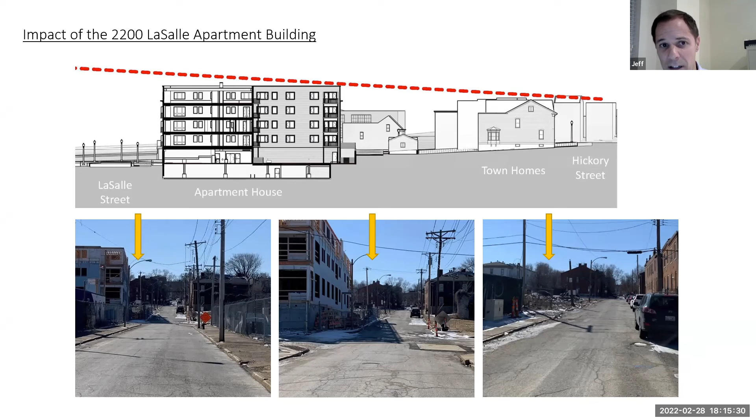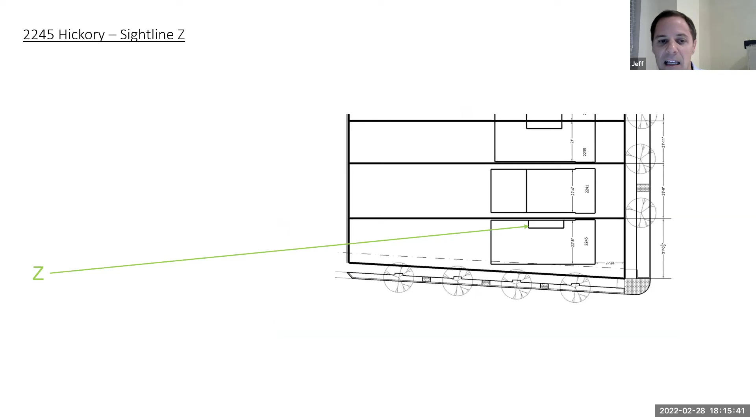The next photo is pretty much at LaSalle. And then the next photo, the last photo on the right, is the view from point Z, which is the next slide. So there it is in plan. Next slide. And there it is in section.

This is the first arrow that has hit anything. All of our arrows have been going over the top of buildings, and now here's one that actually hits something. It hits the pop-up.

From that distance, we're well past our site. We're north of the alley that bounds the northern boundary of our site. But still, from that spot, you can see a little bit of pop-up. Next slide.

And that's a look at what you might see. You see a little bit of railing, and I believe we see 2 feet of railing and about 5 feet above the railing of the pop-up. The pop-up is only 4 feet wide, just wide enough for a staircase. So we're looking at something kind of like an oversized refrigerator sitting on the roof.

The reason why I think it's important to offer the pop-up on this house is, as I mentioned a minute ago, this is the only one that can have a view to the north from the roof deck. So with visibility comes a view. They go hand in hand.

And my request to you, in addition to acknowledging that the pop-ups on 2231, 33, 35, 15, and 21 will not be visible from the street, I'd like you to just let me go ahead and do this one. It's a huge benefit to the home. This is the only home that can have a large view to the north from their roof deck. And the cost is seeing something that looks like a refrigerator up on the roof, which is very minor.

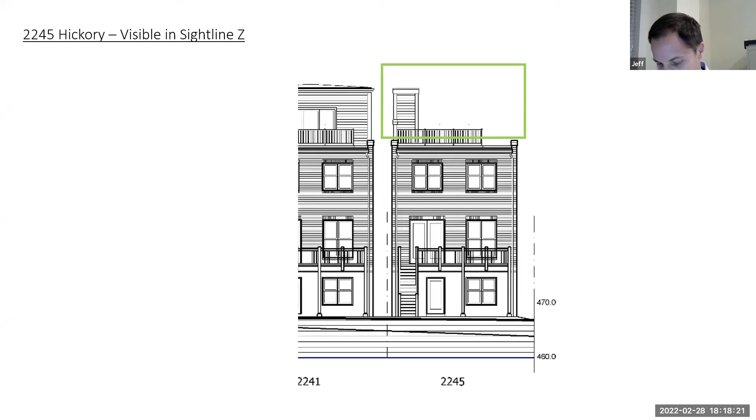Commissioners, questions for Jeff? Okay, hearing none. Who did this? Jan, yes, you just saw this? I did. Questions or observations?

I think that something should be done to the design of the pop-up for 2245. Thank you. Now, there are also neighborhood representatives that want to testify.

I'm not sure that they... No, I can see that in the chat. What about painting it like a refrigerator? Like a SMEG, yeah.

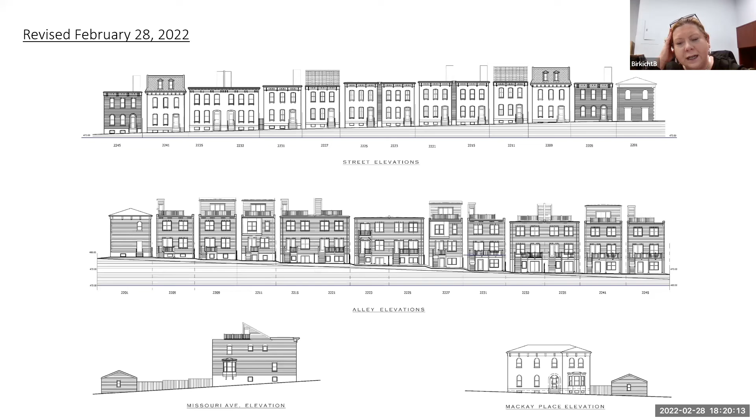May I just point out, just so we remain clear, that this hearing is an appeal of 2235, 2233, and 2231. Any comments about 2245, there was no application for preliminary review, so these would just be guidance. Okay, I just wanted to clarify that in the same way that Jan Cameron did at the beginning of the meeting. Thank you, Barb.

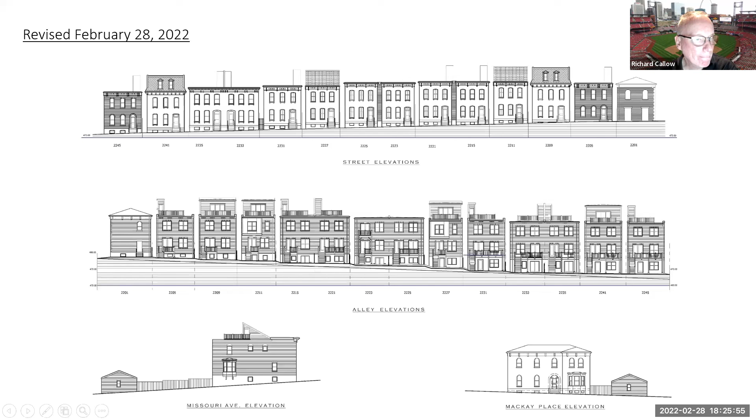Thank you very much, Commissioner Killeen, I am back. Anybody else want to speak, Meg? No. Okay. Commissioner Hamilton, have you got a motion? Yes.

My motion is that, because it's my understanding based on the agenda, we're talking solely about 2231, 2233, and 2235. So my motion is that the preservation board overturn the administrative denial regarding the pop-up roof, or the rooftop deck, because it's not visible. I'm thinking we're just talking about those three, even though other numbers have been thrown in. I'm going with what the agenda says. So that's my motion.

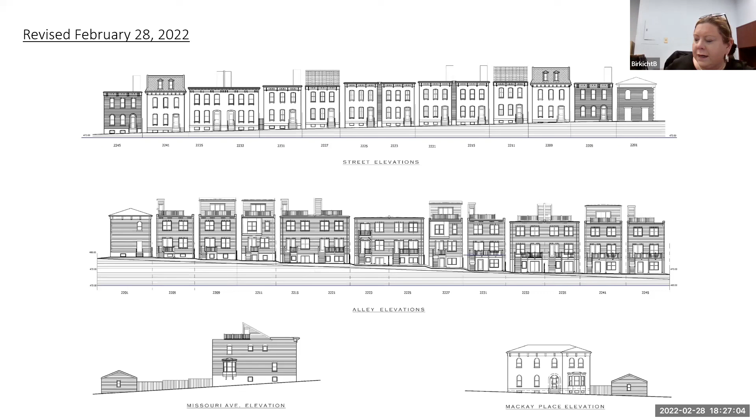I'll second it. Barb, is the motion clear? Yes, the motion is to overturn the administrative denial as to 2235, 2233, and 2231 with respect to their pop-up roofs, as I understand and have recorded it. Commissioner Hamilton, is that correct? Yes. Okay, any discussion, commissioners?

Could I comment? No, we're in a different part of the meeting at this moment. And this was my understanding too. There's a lot of evidence and detail and slides that went into the presentation. I concur, I think we're dealing with a very small visibility issue, and frankly it does not bother me much.

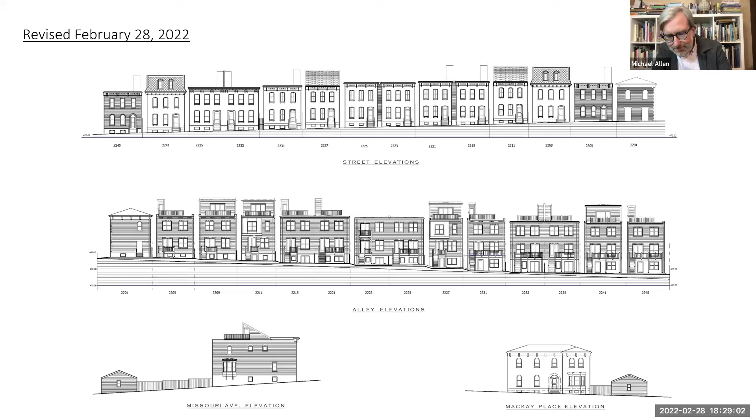Commissioner Allen, do you vote yes or no on that motion? I vote yes. Commissioner Robinson, yes or no? Yes. Commissioner Hamilton, yes or no? Yes. Commissioner Killeen, yes or no? Yes.

Commissioner Richardson, do you vote yes or no on the motion? I had a recusal. That's correct, you were. Commissioner Weber, do you vote yes or no on the motion? Board Member Weber had to leave. Okay. The chair abstains on this motion. That is four yeses, no nos, one abstention. The motion carries.

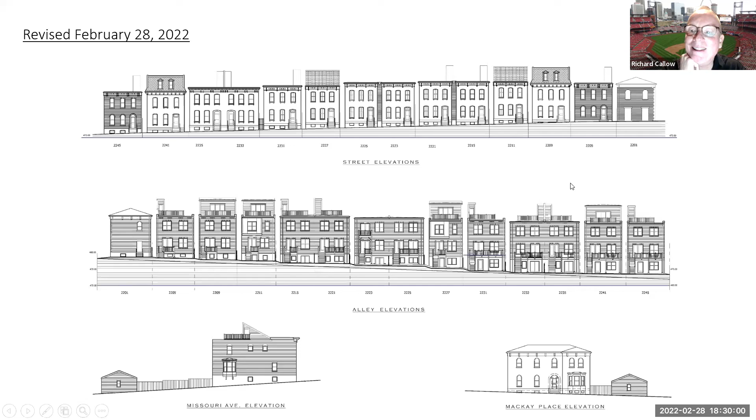Meg, have we done enough on this item? Yes. Okay. Commissioners, that completes our run through this agenda. Did anybody else have anything to add for the good of the order?